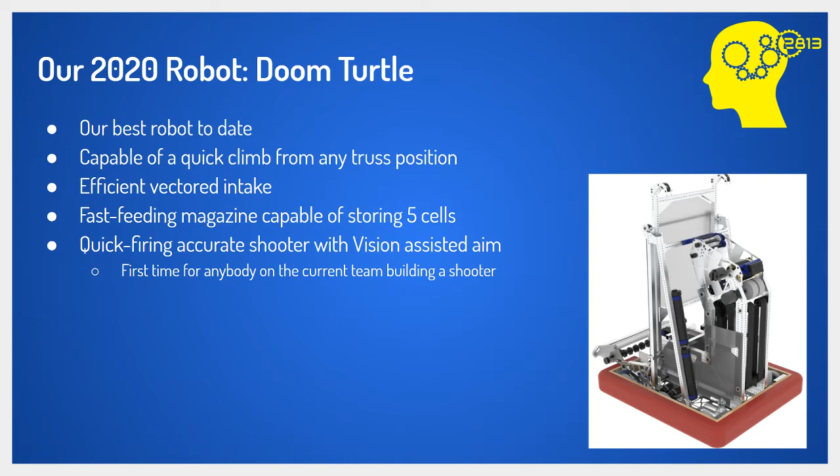We started off with priorities before we did anything else. Before we prototyped, we set down some guidelines and followed them. We didn't want to make a turret as it was too complex for us at the time, and we had never made a shooter before, so we wanted to keep it simple.

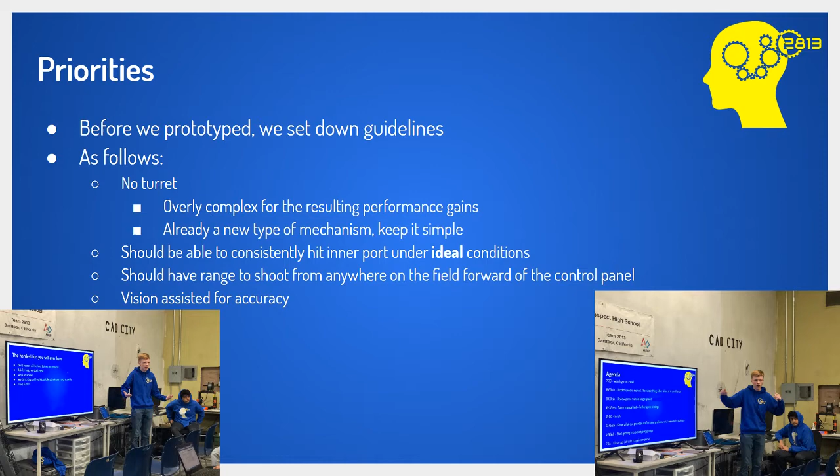We wanted to consistently hit the inner port under ideal conditions, namely when the ball was not damaged, and it should have the range to shoot from anywhere on the field forward of the control panel, to give us flexibility. It should also be vision assisted.

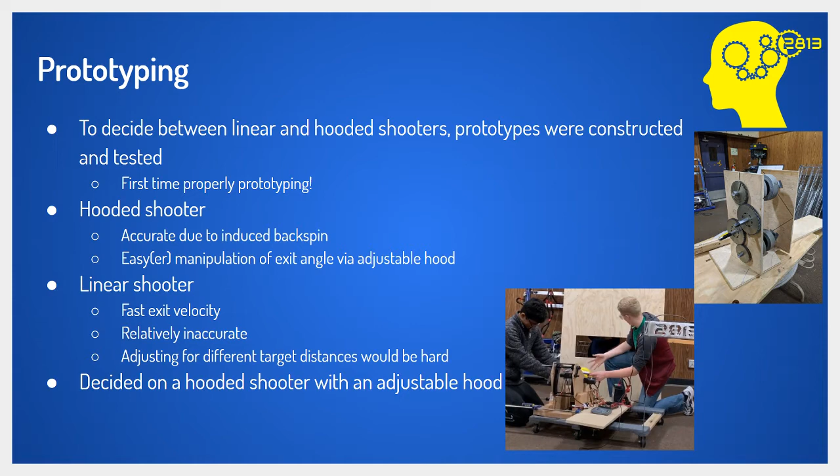We then moved on to prototyping. The main decision was between linear and hooded shooters, and we constructed prototypes of both. The hooded shooter turned out accurate due to induced backspin, with easy manipulation of the exit angle via the adjustable hood. The linear shooter was faster, but had relatively inaccurate trajectories, and adjusting for different targeted distances would be much harder, so we decided on a hooded shooter.

Design: we CADed the design in Onshape, consisting of 2 aluminum side plates, 2 Falcon motors driving 2 4-inch urethane wheels via a 2-to-3 belt upduction, and we got around 8,000 RPM max.

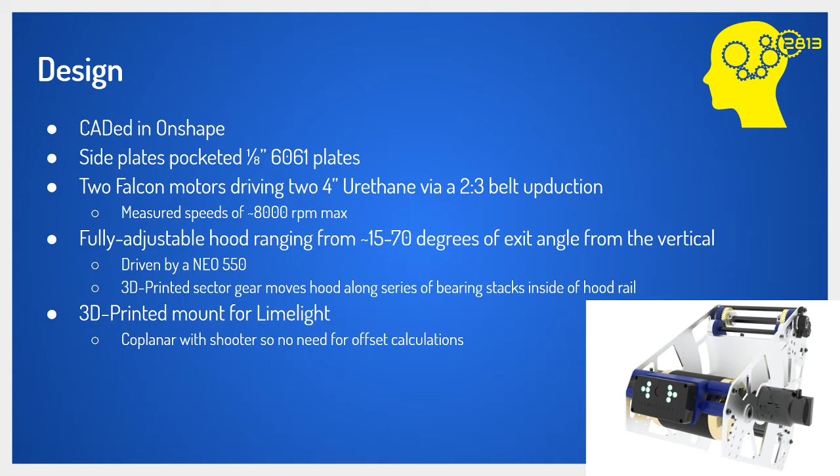We had a fully adjustable hood that could go anywhere between 15 to 70 degrees of exit angle for the ball. It was driven by a single Neo 550, with 3D printed sector gears to move it up and down along bearings, and a 3D printed mount for the limelight. It was coplanar, so we didn't have to deal with any offset calculations.

We had a few hiccups along the way. For example, the polycarbonate backing we used turned out brittle when mixed with epoxy, and experienced catastrophic failure. The hood mechanism wasn't toleranced very well, and we used 3D printed parts where we should have used aluminum, which led to a lot of play during max extension and wasn't very accurate. The shooter also could not fire at a high rate because it didn't have the rotational inertia to do so.

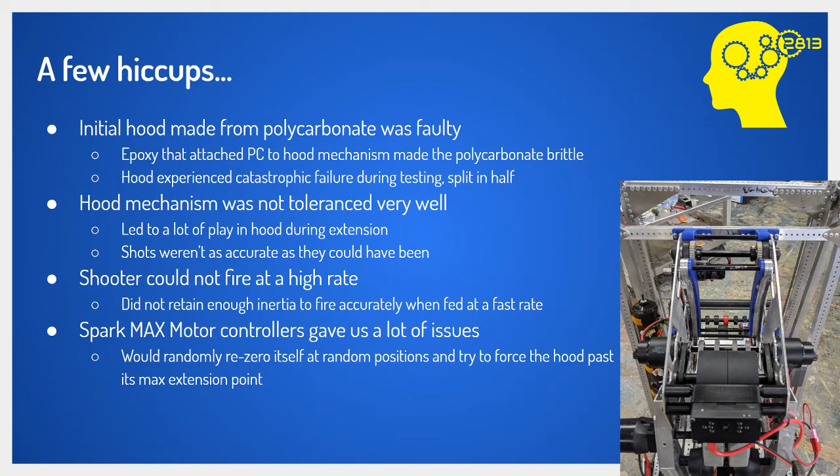The Spark Max motor controllers gave us a lot of issues, randomly deciding to re-zero the hood when it shouldn't have been zeroed, which would cause it to try to move forward past its physical max extension point and strip the belt that drove it.

However, we addressed this very quickly before CVR. We replaced the polycarbonate sheet with an aluminum sheet, which was much stronger, and used bolts instead of epoxy, which was much better. The hood mechanism was remachined using aluminum instead of 3D printed rails, making it much more sturdy, and you could barely notice any play afterward.

We added some 4-inch steel inertia discs on the sides of the wheels, courtesy of a local team, 1351 TKO, which allowed us to shoot very fast due to the increased rotational inertia. We also added a physical limit switch so we could manually re-zero the hood should it decide to re-zero itself during competition, giving us a failsafe.

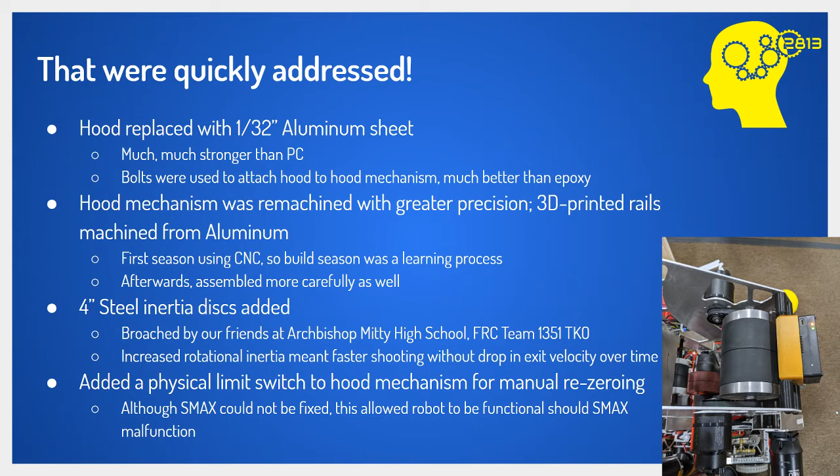Vision: the way we tackled vision was by using a limelight system on the shooter to calculate the X offset from the target and get the distance.

Using the X offset, it could align itself with the press of a button. Using data points we got by manually adjusting the hood and getting the limelight angles for each RPM value, 3 of which we used, we had 3 functions that would take in a limelight angle and spit out a rev encoder value we could use to get the correct hood value for that distance.

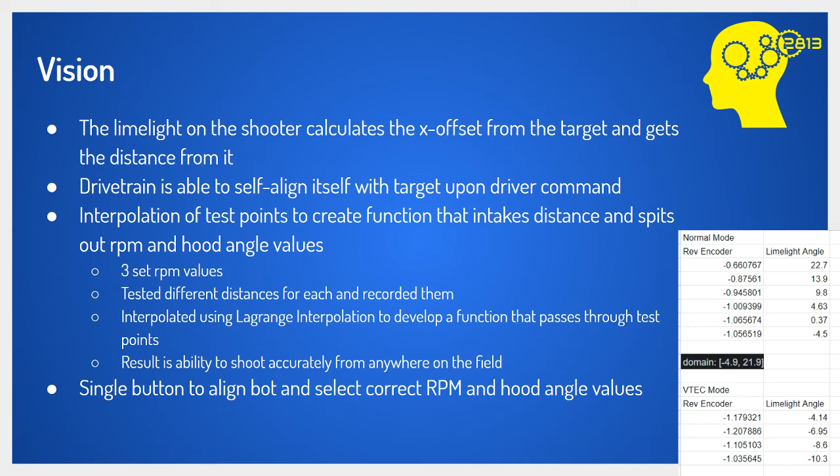What we ended up with was a very nice system that could shoot from anywhere on the field with a single press of a button.

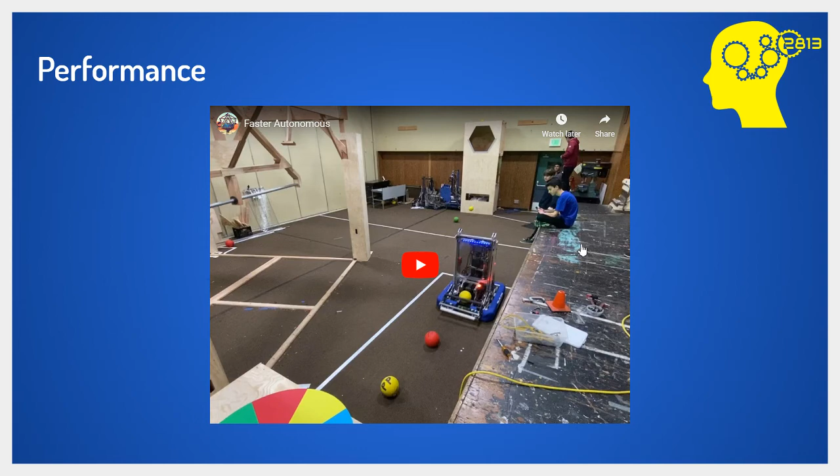I'm initializing 6-ball.